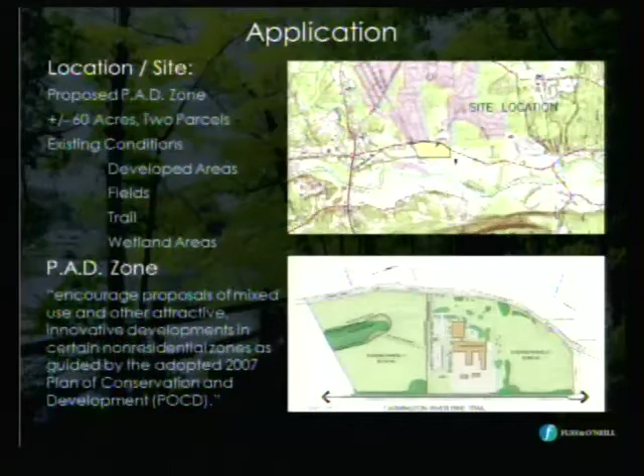So the PAD zone encourages proposals of mixed use and other attractive, innovative developments in certain non-residential areas of town. And the PAD zones are created specifically because of the flexibility that it offers to developers that want to come in and do something maybe a little bit more creative than the underlying zone would normally allow.

The prime developer is Garden Homes, of the apartments. They've been around for a long, long time, since about 1955. They've developed over 40,000 units of rental housing and an additional 40,000 units of for-sale condominium and single-family homes. They're not strangers to Connecticut - they have a number of sizable projects in Connecticut.

The design team is Fuss & O'Neill, doing planning, landscape architecture, engineering, traffic, environmental, all of this kind of thing. Bill Krosky Architects will be showing you some architecture. RKG Associates was hired - I won't show much of their information today, but if you're interested we can see it and talk about it. They were hired to look at the feasibility of absorption of these units, whether Simsbury can build and then lease these, as well as build and lease the commercial or mixed-use components. They also prepared a fiscal impact analysis in terms of the tax base that would be generated as a result of these developments.

Mike Klein, again no stranger to Simsbury - Environmental Planning Services is taking care of all of our wetlands and biological needs.

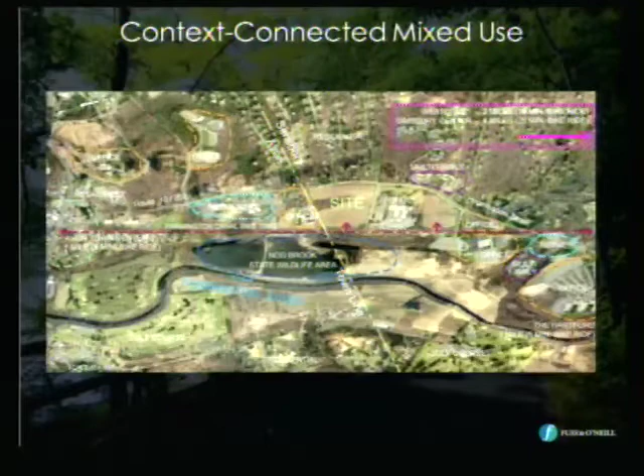This entire neighborhood is a mixed-use neighborhood. You've got employment centers on either side of the site. Here's the site. You have retail, multifamily and single-family residential to the west of Hop Meadow Street. You have the Nod Brook Wildlife Sanctuary down here, and one of the most important parts of this development to us is the bike trail. That bike trail abuts our site, and we feel it's a prime consideration with respect to the attractiveness of this development to attract people that really want to use the bike and operate that mobility alternative into downtown Simsbury, Weatogue, downtown Avon, and then beyond.

So this project wasn't completed in a vacuum. We've read and actually prepared some of the previous reports for the town of Simsbury. Clearly you're going to hear a lot about the POCD tonight and the sort of conformance with that. But Fuss O'Neill also did the Route 10 corridor study, which basically relates to this site through the ability to maintain a two-lane character of Hop Meadow Street. We also participated in the previous River Oaks application. Now, when looking at the previous River Oaks application relative to this application, we are almost half of the density and square footage and pavement that River Oaks was.

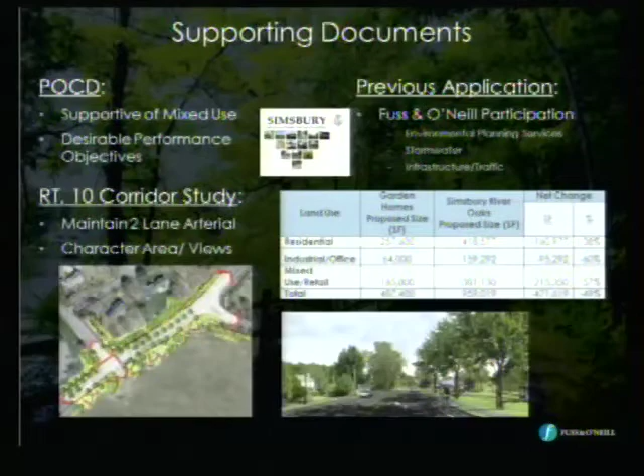So just to give you a sense of scale in terms of what we're looking at, that's where we are at this point. So the fundamental tenets of the design approach are really not borne by us, they're borne by your Plan of Conservation and Development. I'm not going to read all of these, but we really stayed very true to all of these things as part of the master planning and the design process, particularly with respect to a couple of things. One is views, you'll see some things about views in a minute. The second is the preservation of open space and how that open space is arranged. And then lastly, the two-lane character and the preservation of that character along Hop Meadow Street.

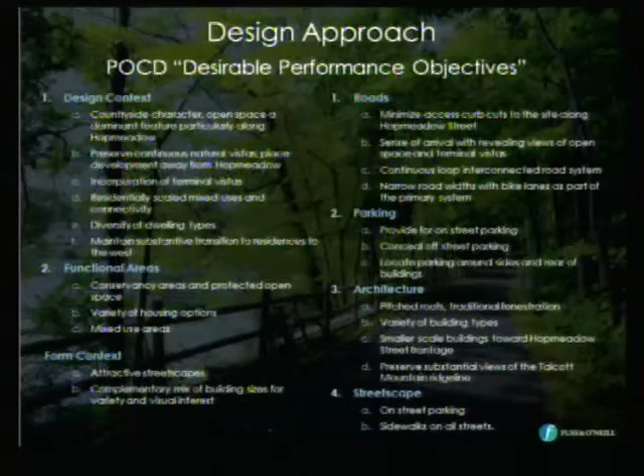Again, not going to read all this, but the Plan of Conservation is very clear about desirable performance objectives with respect to this alternative. So this is an alternative strategy, it is not the underlying zone. If it was the underlying zone, we could build a heck of a lot of office space, bring those parking lots and buildings to within 40 feet of the property lines, including the property line at Hop Meadow Street, and build them 40 feet high. So the POCD under this alternative strategy is clearly intending not to allow that to happen with the development of this parcel.

So I started to talk about views, and I want to spend a couple of minutes on views. There are some iconic view sheds on Hop Meadow Street to the Talcott Ridge and to the Heublein Tower. One of the important tenets of the Plan of Conservation and Development is to preserve a continuous view of the ridge line where possible, and to create terminal views. In other words, areas where buildings open up and you actually have somewhat unobstructed views all the way back to that full mountain range.

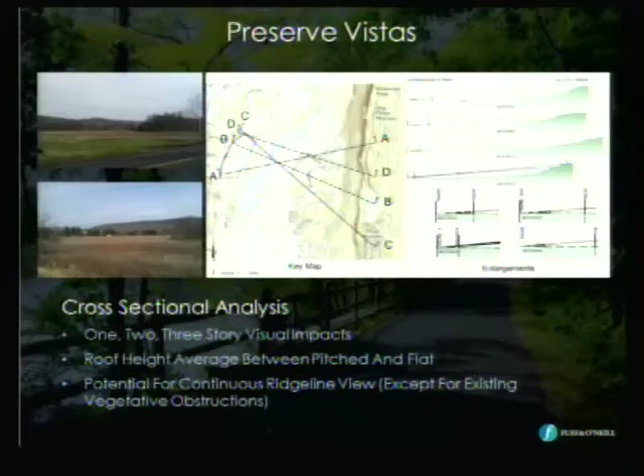So we cut cross sections, and these cross sections went from Hop Meadow Street all the way to the top of the Talcott Mountain Range, and that's what these basically are. This is a USGS map. These A, B, C, and Ds are where these cross sections are cut. That's the Talcott Range, this is Hop Meadow Street. We wanted to get a sense of, at driver's eye level, how far back do buildings need to be placed and how high can they be and still maintain a view to that ridge line. And these are too small, I understand you can't see them, but you'll see an enlargement graphic a little later when we start talking about architecture, roof pitches, and overall building heights.

What this analysis translated to was the beginnings of approximations as to for a one-story, a two-story, and a three-story building, where would those buildings have to be located in order to maintain that view? Again, a continuous view to the ridge line.

Clearly, if you loaded up this entire frontage right on that line with one-story buildings, you would see the ridge line, but not much of anything else.

So the POCD, and we agree, also recommends terminal views, particularly at these intersections from Blue Sky and Old Meadow Plain Road, the ability to see right through the site, unobstructed, to that mountain range. It's that range in this area that gives Simsbury a sense of place and serves as a gateway coming into town.

Some of these views are pretty dramatic. I will say, however, that there is existing vegetation that currently blocks those views.

So the CLMP property, which 20 years ago, somebody probably made them plant pine trees all over the place in order to block the view of that office building. Well, those pine trees are now 60 feet high, and that vegetation completely obstructs the view of the range anyway. There's an existing patch of mature vegetation that covers the wetland area I described before.

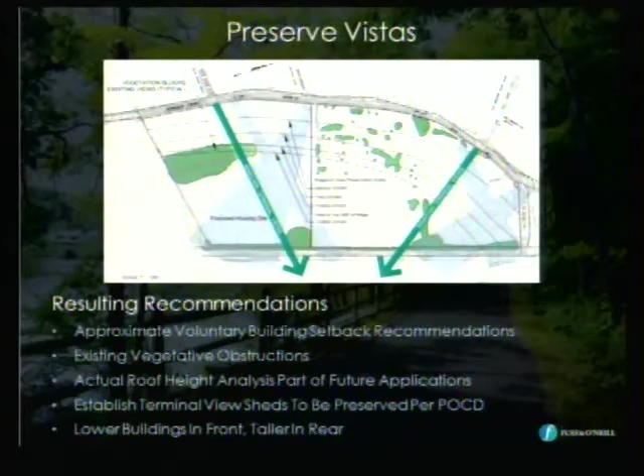Therefore, obviously, there's no views within that area. The fact that it is wetlands means that we're not going to be removing those trees, and so there are certain places here where we will not be able to either maintain or enhance the views that, frankly, aren't there today.

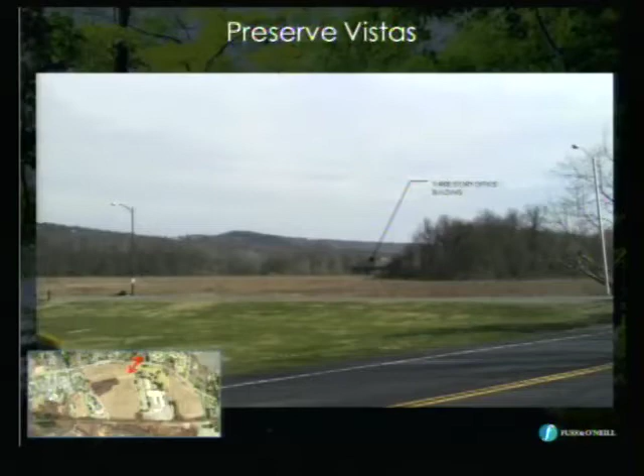Again, more views somewhat obstructed by that wetlands vegetation system we talked about. That's better, Hiram, thanks.

Continuing to move, now this is a 2 to 3-story office building, again adjacent to the site, but it's much closer - the one I just pointed out was way back there. So even with that, you can still begin to, if there wasn't the vegetation in the background, see at least that ridge line.

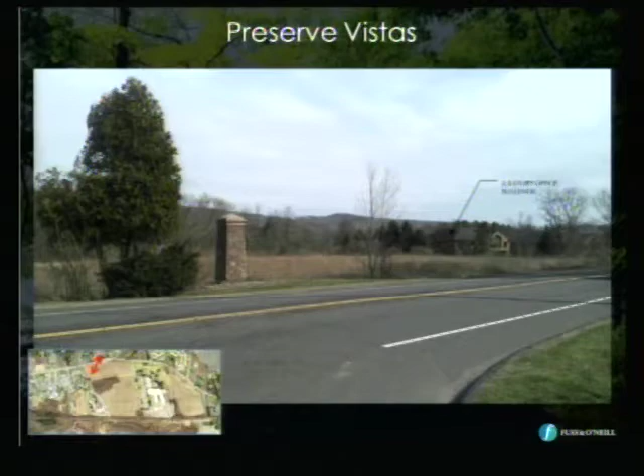Turning around, and this is probably one of the more iconic views, and interestingly enough it's pretty close to where we've set our entrance drive and purposely set up this terminal view, one of a number of terminal views. Rolling back through the CL&P site - existing scrub vegetation, which if removed would help in a number of cases.

And back out. So that viewshed system and the system of open space really was how our development pattern kind of emerged here. The viewshed analysis told us that if we can begin setting buildings back, putting the smaller one-story buildings in the front of the site and the taller buildings in the back where the viewshed doesn't matter as much, that might be a development pattern that would work.

So we've begun to establish a series of open space systems. The primary open space system is, as the POCD recommends, a green space of between 150 and 200 feet between Hopmeadow Street and the nearest piece of pavement or building. That system connects into these central open space systems, which become part of the terminal view sheds associated with what the POCD is recommending at both of these intersections.

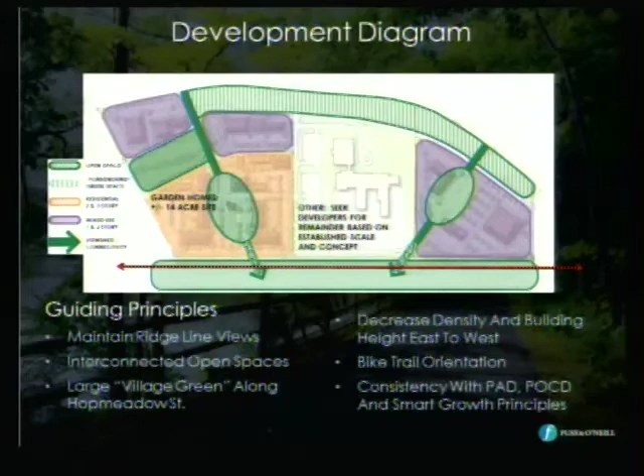This is an important component of what we're talking about. We think there's a real hook with respect to the residential and mixed-use character, and the bike trail connects all of these mixed uses in the neighborhood as well as to the town center. Hopefully people will get on their bike and ride to the restaurants in Simsbury and then go home rather than bringing their car into town. I think that's a real viable opportunity for the town.

So what happens if this project is approved? What will happen immediately is that Garden Homes, K&K, will come in and build 181 units of housing on this site, which is about 14 to 15 acres. They will own the access way that attaches to Hopmeadow Street.

They will subsequently grant rights of access to the adjacent parcels, but by the nature of the ownership of that right-of-way, this is basically going to be a 3-lot subdivision, the application of which we would supply to you if we go forward with the site plan application part of it.

As I mentioned, the entire rest of the property is pretty much going to stay in single ownership. I would suspect at some point development on this piece of land will necessitate a subdivision line that further subdivides out those two things.

So a little bit of a breakdown of each of these parcels. 1A, in the upper left-hand corner, is mixed use. That's two stories, about 51,000 square feet total for both floors.

1B is the Garden Homes site. That is 181 units of housing, comprised of 25 townhouse units. Those townhouses, because they're smaller, are located closer to Hopmeadow Street. They're 2-story, 2.5-story buildings. The remainder, 156 units, would be primarily 1-bedroom apartments and about 20% 2-bedroom apartments.

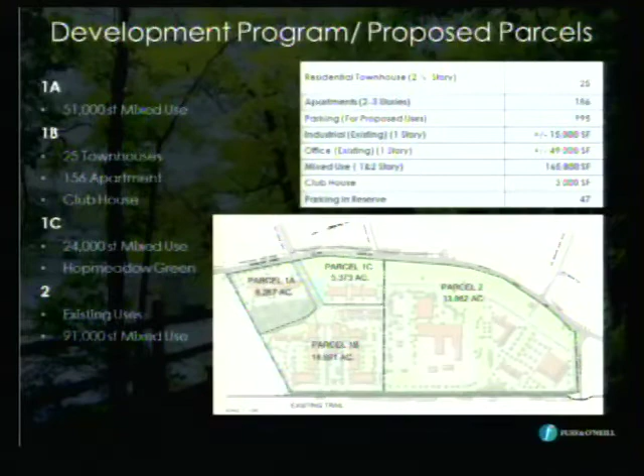In the plan of conservation and development, some of those desirable performance objectives have to do with open space, and we were fairly careful in terms of how we located open space. The open space in this plan serves multiple functions. There are passive open spaces, such as the Hopmeadow Green we talked about, that's 150 to 200 feet. And then there are more active open spaces containing active amenities specifically for the residents—swimming pools, clubhouses, and the like.

There are also passive open spaces designed to do a couple of primary things: one, break up the parking fields so we don't have a sea of parking in any one location, and two, they're part of our stormwater management system for infiltration. The soils out here are fantastic for infiltrating. So the idea from a green infrastructure standpoint is to divert pavement runoff into these open spaces to maximize infiltration capabilities.

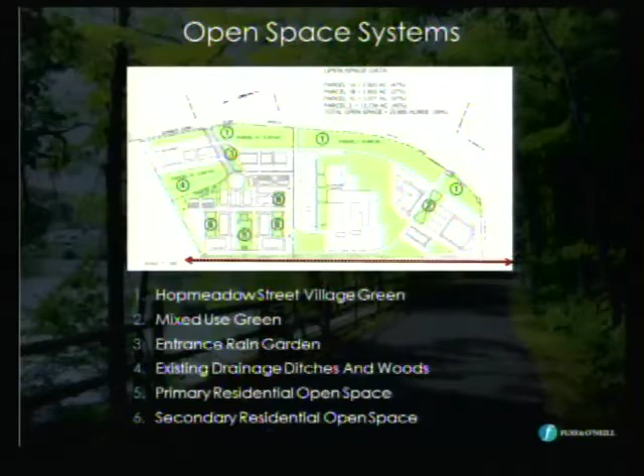This is an enlargement of the residential component, and you can start to see that's the primary open space. I'd like to point out how this is laid out, sort of a grid pattern. When you come in the entranceway, you'll have a decision point in terms of going to the commercial components. Everything is interconnected across the whole site.

So we only need 3 curb cuts on Hopmeadow Street, 2 of which are primary here and at the northern end, and 1 of which is secondary and probably going to be used for service only. At some point in time, upon full build-out, that intersection becomes a signalized intersection. However, that signalized intersection doesn't have all the warrants it needs based just on the build-out of the housing component.

So the block and grid pattern as you get in here tries to locate the smaller buildings in a block form, tries to get parking to the rear of these buildings, maximize parking on the streets, which reduces the big surface lots, and sets up a block and grid system whereby the buildings are floating to some extent in open space. We tried pretty hard to have open space on one side and on the opposite side of these things. All of this connects basically right there to the bicycle trail.

Now, in an effort to reduce pavement, we decided to take about 13% of the net parking required for the residential use and set it in a deferred status. We're pretty sure we're not going to need it - I think it was 47 spaces that would end up in reserve. That would be a contribution to the green space, though the green space and open space calculations do not include that.

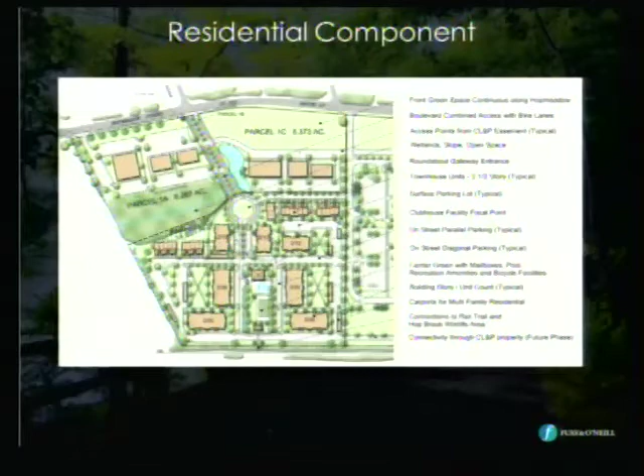I'd like to have Bill Krosky come up and maybe say a few words about some of the architectural components.

Let me ask you a question, just out of curiosity. If you take 1A and you say mixed use, what are you anticipating the components of that would be - the stores that move into that? Our market folks have analyzed retail leakage, meaning money that Simsbury residents are spending out of town. Some of the things they've come up with are furniture, hardware, and services such as laundromats - things of that nature. That's what they're thinking about now.

Thanks, Chris. Good evening, everybody. I'm Bill Krosky from Krosky Architects, and I'm in charge of designing the buildings for this project.

So the first building we're showing here is the smallest of the 3 residential building types, and it's comprised of the townhouse units - a 2.5-story building with a bit of variety in different unit types. One of the things we tried to do for this project on all 3 of our buildings is capture traditional New England character by using pitched roofs, residential clapboard siding, double hung windows, and things traditional to New England architecture.

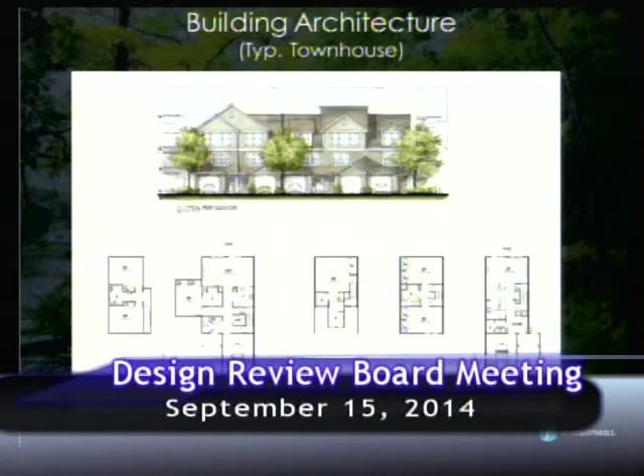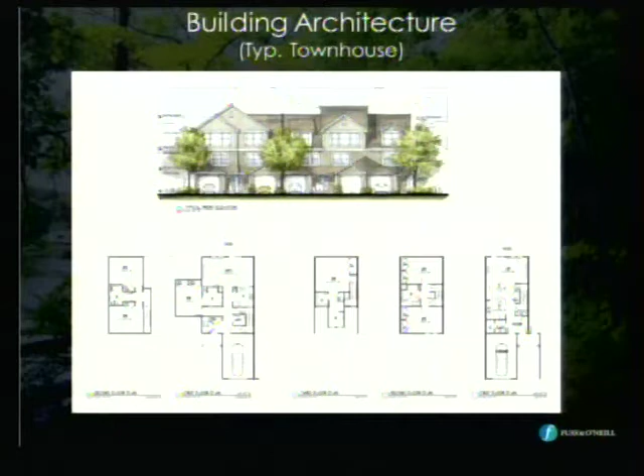So this building, again, is the townhouse building. We're showing a typical unit on the lower left, which has a garage and entrance at the main level, entrance foyer, open kitchen, living, dining room area, stairs to the upstairs with 2 bedrooms and a bath, and then in the roof shape a master bedroom suite with its own bathroom and walk-in closet. We also have another unit on the left, which is an accessible townhouse with a bedroom and bathroom on the first floor and 2 bedrooms on the second floor.

Now, the units will be units of 4? We have, I think, one building that's 4, several that are 5, and one that's 6 in terms of the clusters.

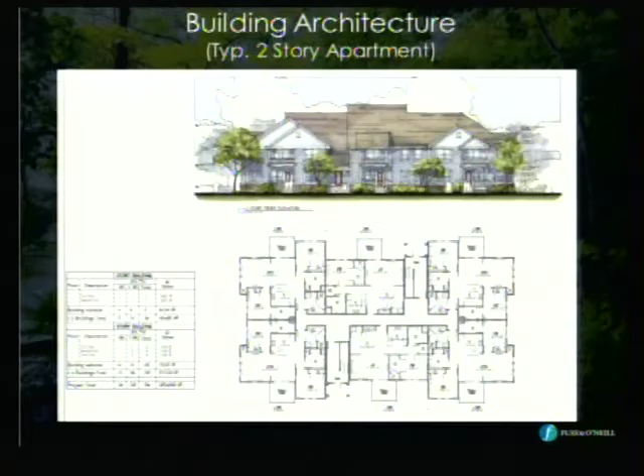This is the middle-sized building, which is a 2-story building. All the units are flats, and you can see in the plan there are 6 units on this level, 3 on each side. We have an entrance point on either side into a stairwell and lobby and a common hallway.

The first floor of this building, we've got individual entrances that lead into those ground floor units because we want to try to create a neighborhood feel to the development where all the ground floor units have direct entrances and front porches, so that the neighborhood feels friendly and walkable.

We're using traditional materials and massing and features of New England architecture. We've also got some cultured stone on the base here. We'll be using vinyl siding and trim for the siding and the trim, and then asphalt, architectural grade asphalt shingles for the roofs.

And this is the larger building that occurs at the rear of the site. It's a 3-story building. Again, all the units are flats, and we have 10 units per floor. We have a stairwell at each end, elevator in the middle, entrance from both sides into that common space.

On this building, all of the ground floor units have individual porches and entrances. The upper floor units have porches that are above those individual unit entries, so they have outdoor space as well. This building has a little variation on one end, depending on how the buildings are adjacent to each other. In some cases we have the decks on the end, in other cases along the long face of the building.

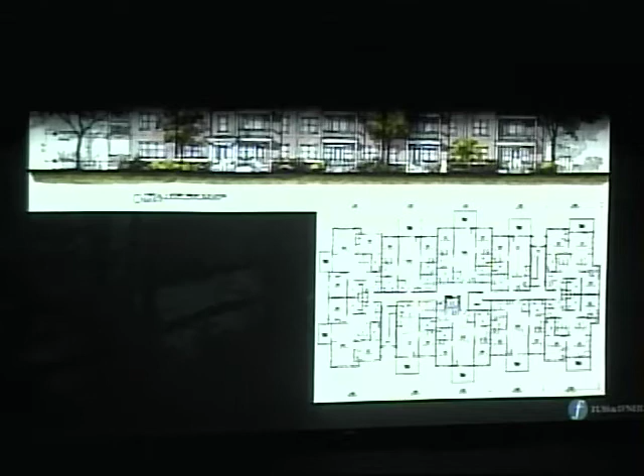Are we going to get to the site plan in a minute? We can go back to that, we'll get to the site plan again and point that out. We'll also have a small community building, a clubhouse that sits on the green, a little 1-story building that's kind of the jewel of the project. And then we've shown a character image for what the 1-story commercial that would be built at a later date would be, out at the street line.

Chris, you want to do this part? And that is not part of this, that commercial is not part of what we're looking at today?

Well, what we're approving today is an entire master plan, a PAD, a PAD zone application. The PAD zone includes things such as the mixed-use components that would be built in the future.

But are we to comment on the design of that building right there? Well, you can, but it probably wouldn't make any difference. This will be a situation where, from a character standpoint, this is maybe the kind of architecture that... Okay, that's all I wanted to know. And in the future, the other three are... Yes, that's what you're gonna do. That's what we're doing, yes, all the housing.

So in this diagram, we just wanted to show how the height is diminished at the front of the site. Here, the commercial building is one-story, and then the buildings get a little bigger as you go towards the back. You can see the relative scale here at the bottom, and the green line shows the view line.

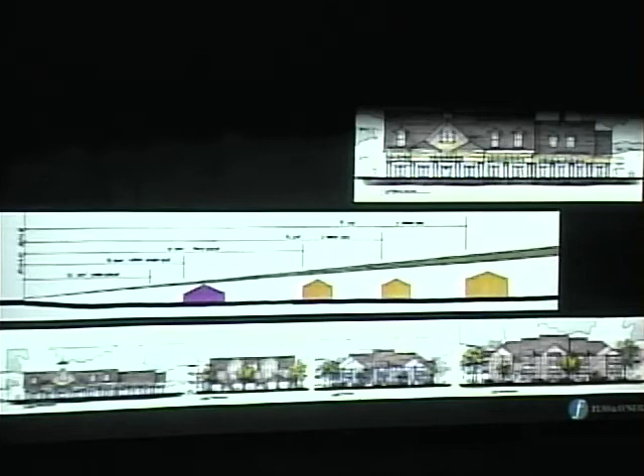I just want to go back and cover one point on the townhouses. In this case, there are rooms in the upper floor unit that are built within the roof structure, so it does have dormers to bring the height down. You can see the eave line here that occurs at the top of the second floor.

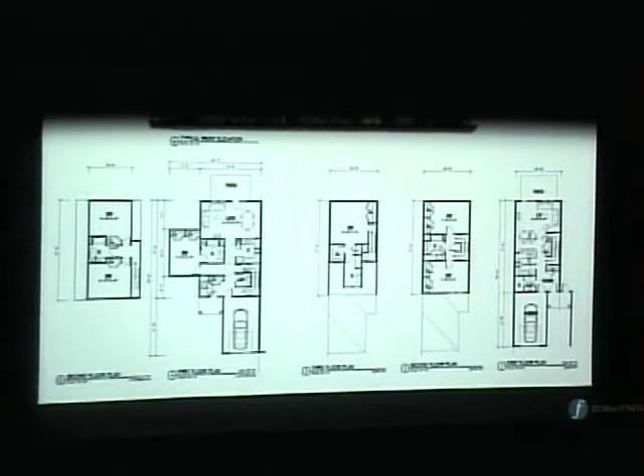We've tried to do that particularly in the townhouses at the front of the site, where we have a little more flexibility in terms of building construction and design when we don't have to worry about communicating horizontal spaces such as common hallways. So we have more flexibility with this building type as opposed to the bigger buildings. Just wanted to point that out.

From Route 10 to the back of the property to the bike path, how much does it drop? Well, it's almost dead flat, except from Hopmeadow Street, where it drops down pretty quick, about 6 to 8 feet, and then drops a little further as you get further back.

As you get to this wetland it drops a bit, but when I set the elevation of those structures I figured a good part of this would be filled in anyway -- it's sort of like a swale. Fundamentally the site is almost dead flat, but it drops about 8 feet between here and here. The total site is about 900 to 1,000 feet in depth total.

To answer your question about parking, the two bigger buildings are these two, and we have parking along the back, parking over here, and parking on the street in front of both of those buildings. So it's really spread out pretty evenly around the site.

While you have that up, Chris, I have a couple of questions and comments. What exactly is going to happen with the CL&P buildings and landscaping -- is that going to remain exactly the same? I would assume so, at least in the short term.

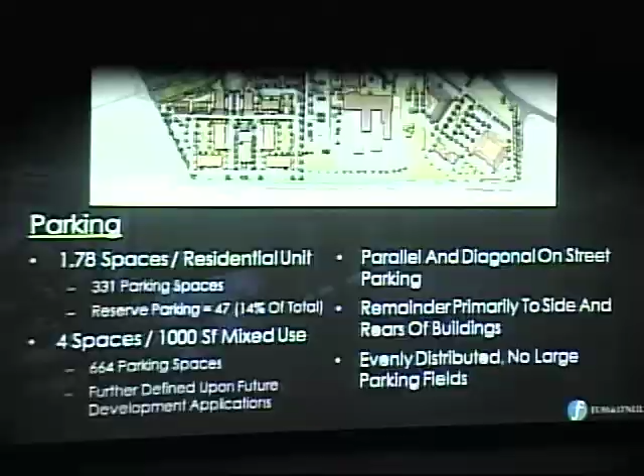One other important point, along the questions Tony and John asked, is that the density you're seeing in this master development plan is locked in, should the PAD be approved. So the density is locked in. Now, whether the building arrangement changes slightly would be something you'd see at the site plan stage. This is a master development plan concept with things like the amount of impervious area, the amount of open space, and the density locked in at that point.

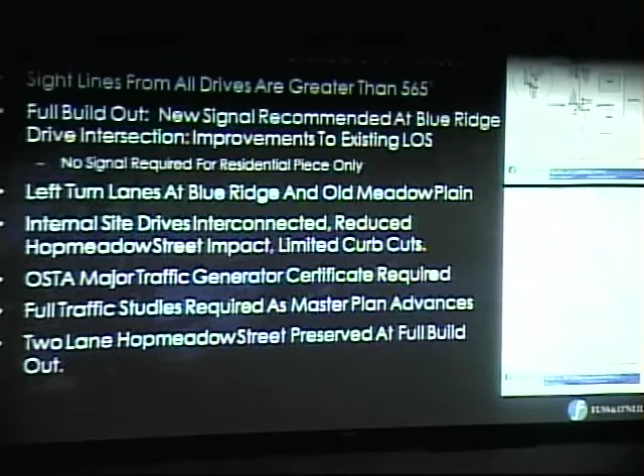Again, not going to go through all of this, but the bottom line is we've done a full traffic analysis, with the full reports in the appendix. Character of Hopmeadow Street is a key component of that, and I think we've achieved that.

So for the desirable performance objectives, I've talked about most of these already: preserving the vistas and views, the character and integrated nature of the mixed open space program, the variety of housing options between townhouses of many styles and the 2 and 3-story multifamily components, the mix of uses which ties into the POCD, and the mix of building sizes. We've placed smaller buildings in the front to preserve the view sheds.

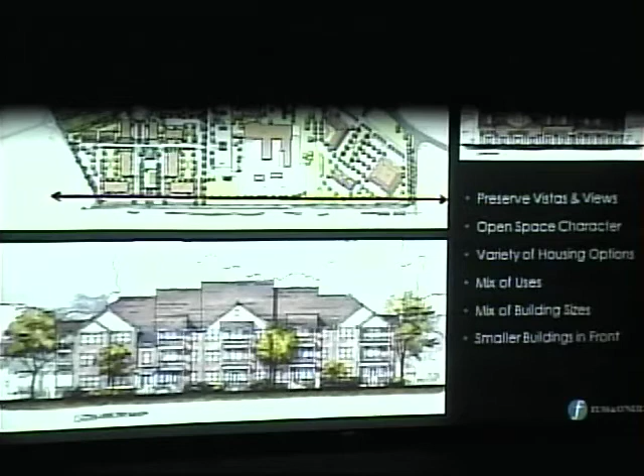And all of this ties right into that bike lane, which I think is going to be a tremendous asset to whoever lives in this community. We're going to propose, and probably inevitably build, bike storage facilities, because I think that's how popular this is going to be for bicycle enthusiasts.

Continuing with the performance objectives, access management is a high priority in the POCD - how many curb cuts on Hopmeadow Street, and how we can efficiently manage our own traffic volume internally with a connected system. At some point, when future development occurs on additional parcels, that connectivity as part of the master plan will need to be incorporated into the site plan approval process. With that system in place, we have 2 new primary entrances along the Hopmeadow Street frontage, 1 secondary entrance, and we're utilizing CL&P's existing driveway as the 3rd primary entrance - not a new one.

There's one question that came up at one of the other presentations: the access way behind the Northeast Utilities building. I know you perhaps can't speak for the current owner, but is there some indication you can give as to whether that could be done in the future, in terms of connecting the north side site with the south side?

Yeah, physically, absolutely. The way we addressed that question was that CL&P is going to be interested in the security of that yard. So at some point it would be a negotiation with the landowner and his leasee in terms of how we create that connectivity while still providing for the operational clarity and security of that facility. Frankly, one of the fire marshal's comments - we've already met with him, and he's enamored with the idea of building this piece right away, because from a firefighting perspective, having that second means of egress in and out of the site would be very beneficial.

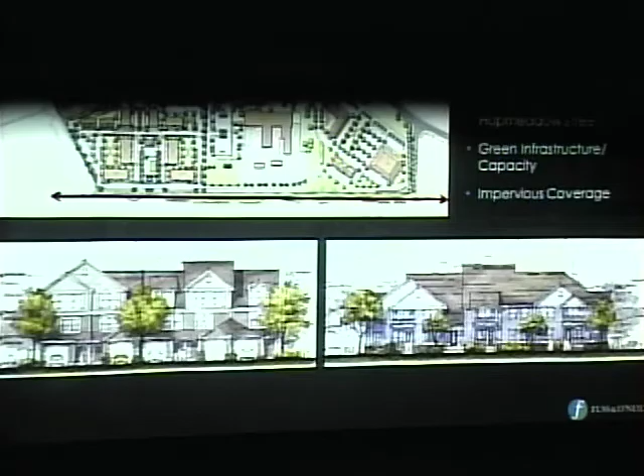Just a quick question - how close are the Avon buildings? There's the Avon town line - the nearest building is that townhouse, its side faces that way. On the Avon side, there are buildings - looking at the survey, that parking lot is about 60 feet away, and that office building is another 30 to 40 feet. What's the building down at the bottom of the map? On the Avon side there's a small square building with a porch - that's an office. This whole section is basically an office park, East Point Park, surrounded by parking.

So additional evaluation criteria has a lot to do with this commission - how we've arranged things. I tried to point out the block and grid pattern and how the circulation system has been developed. Bill talked about how we arranged the buildings in terms of scale and character as you move through the site.

The system of open spaces, and the fact that the buildings are very close to the sidewalks—all of the first floors have their entrance onto the sidewalks, all of the sidewalks abut on-street parking, and then all of that surrounds the primary open space. That's the sense of enclosure we're trying to achieve here.

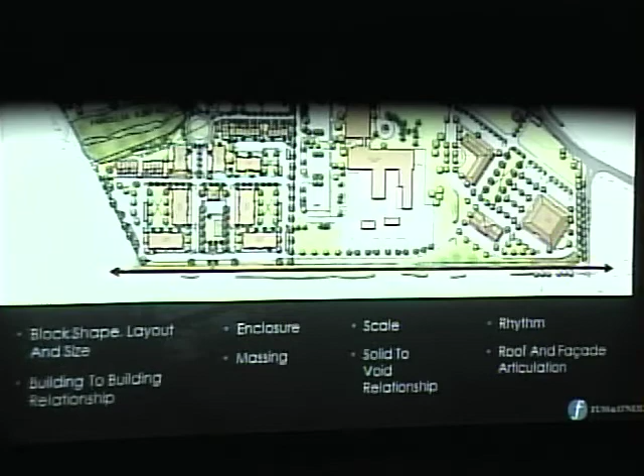And that concludes, I guess, our part of this, and we'll certainly open it up.

Compared to the Hartford building and how far back it is from Route 10—is this about the same distance? No, the big residential buildings will be within... no, Hartford is way back, much further back. Much deeper site, different.

So what's the CL&P building going to look like architecturally as part of this plan? Is it going to be altered to fit in with the architecture created for the other buildings? I don't believe so. I believe at this point in time, the CL&P would remain as it is.

So for future use of the CL&P building, if someone were to come in and say, I want to demo the CL&P building and build something new, that would have to come back through for review. Would they be limited, or could they build anything they want there? Well, within the PAD, this is set aside as an industrial facility with office buildings in it—it would be limited to that particular coverage.

I would say also, the way this plan is proposed, it's limited to one story. If the use were going to change, or the building were going to change, you would see that and make a determination along with the zoning.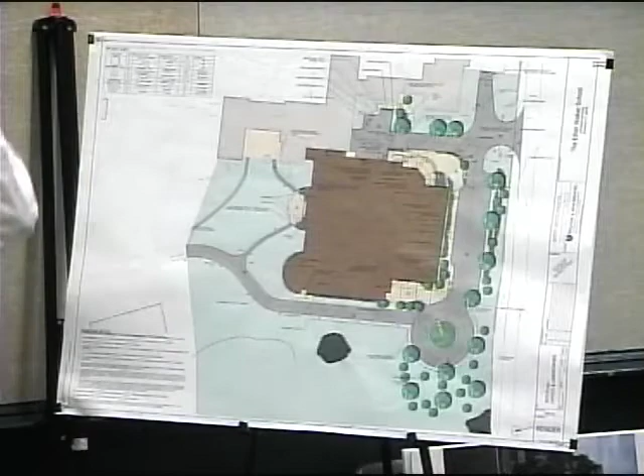One thing we did work with Hiram was we have parking in here, and Hiram's request was to beef up that landscaping a little bit so you don't see the headlights. Now, granted, this is up in the air—as you know, this is pretty high up, and there's a large bank here. But we did take Hiram's suggestion, and we beefed it up: instead of just higher trees, now we put in a low shrub layer, so you really won't see those headlights or those cars parked through there.

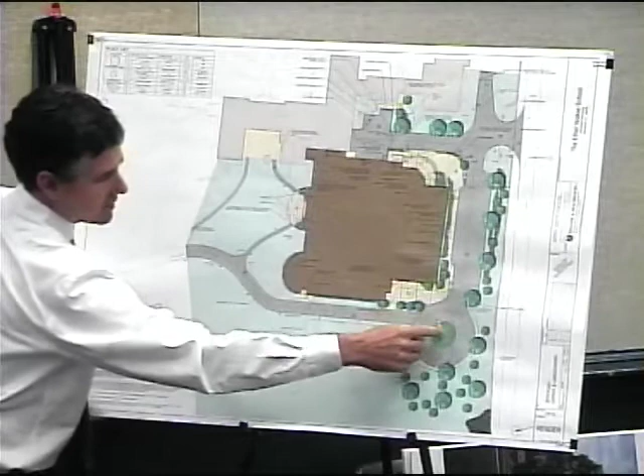But once again, we have some large gathering spaces at the 2 main entrances. Really, the building is the star of this project, not the site planning. The site planning is relatively simple. We will have a landscape turnaround here and a large flagpole located there, but generally the site really fits in.

And as you can see at the back of the building here, as you travel down Bushy Hill, you're virtually not even going to be able to see this. This does create an opportunity to create a new back door or a formal back door to the school, but you really won't be able to see that, even with large pine trees and large vegetation by the front. Even as I travel down that road all the time, I'm not sure I have ever actually noticed the back of the existing building.

It's screened very well. So what's the new building going to be? What is the use of the new building? It's going to be gym, athletic areas, squash courts. Lee will walk you through the very detailed design. But it's really about wellness, really tying together the whole campus. Right now they do have an indoor gym, but it's dated, is what we would describe it as.

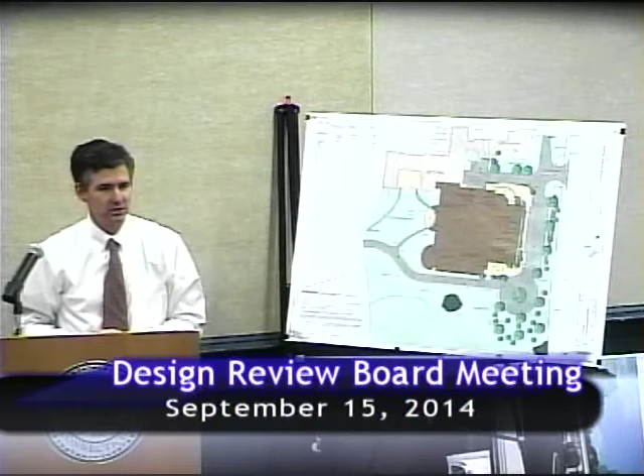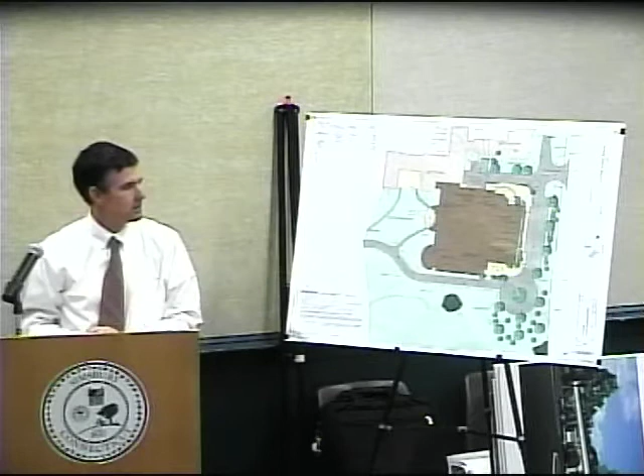So there's the site plan, but I'd like to have Lee come up to get into the real exciting stuff. Is there anything on the ground now where that building's going to be located? It's all pavement. There's a small health center right here. If you go by, it's about to come down, they're doing some asbestos abatement. Right now this is the driveway coming through here, and they have parking fields all through here. So it's not green space today. I'd have to give you the exact number, but probably 75% of that area you're looking at is already pavement.

Nice. Hi, I'm Lee Sherwood of Omar Architects, and it's really hard to tell anything from a site plan like that. It looks like a big blob that we've been working on the campus. Hopefully we can make that a little more clear for you and see what's going on.

This is a different way of looking at it. We've been working with the school for about 3 years, really, in terms of doing a master plan, understanding their program. We work with independent schools, and this is a girls' school, so it was a very different kind of school, a different feeling there. It's a beautiful place, and one of the things it has is the beautiful view and that big solid gym right there that's kind of on the hill.

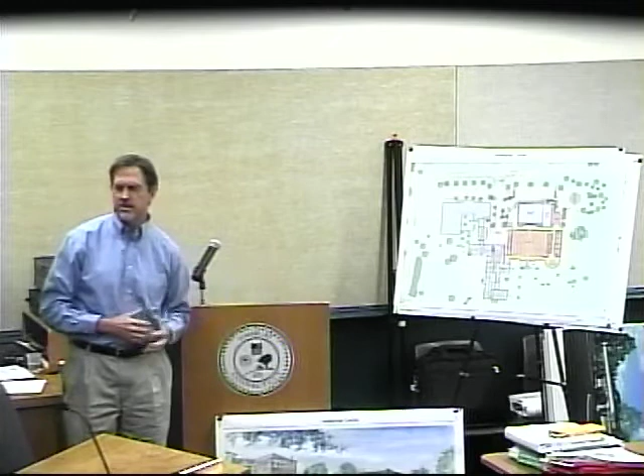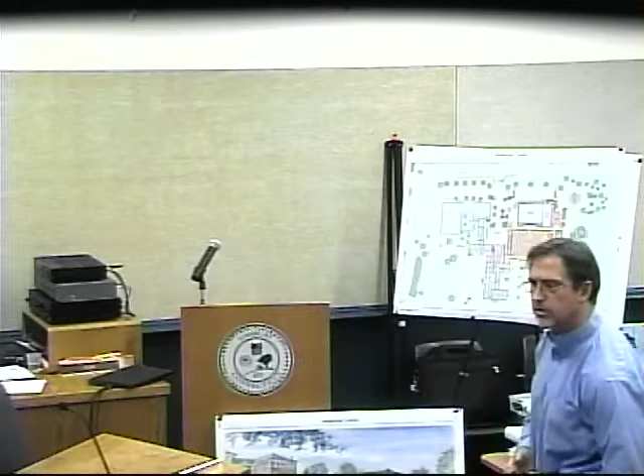When we first started looking at the idea of athletics on the campus, we looked all over the place, down the hill, at different places. But when we felt that for the girls' school the idea was integration and wellness, wellness is different than just athletics. Wellness is part of your everyday life. So when we finally placed the building, if this is Beaverbrook right here, the building starts to integrate with the rest of the school, then it becomes part of their everyday activity. So it was an inspired place to put it.

We did a design that was actually quite a lot taller and bigger, and that went through the process of, oh my goodness, that costs a lot of money, and that whole process. And actually, people are saying over the last few months that they really like this building. It's much more in scale. It has a different feel on the campus. It feels like a better fit.

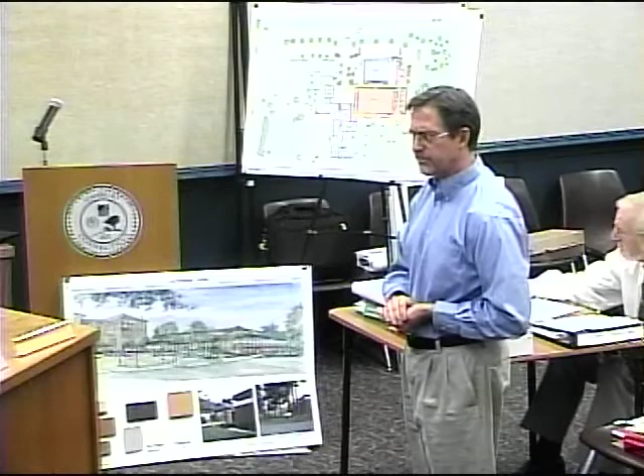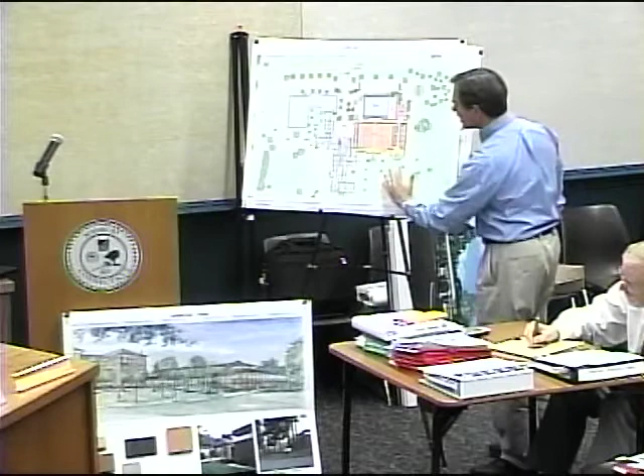So, just so you know, if any of you have been there, there are larger maple trees over here, and there's even a sugar grove, and we tried to keep that feel over here. This is where the hill falls away to the field, and there's these wonderful views. This is actually the south face. We're very sustainable, we're going to show you a lot of daylighting strategies and things like that.

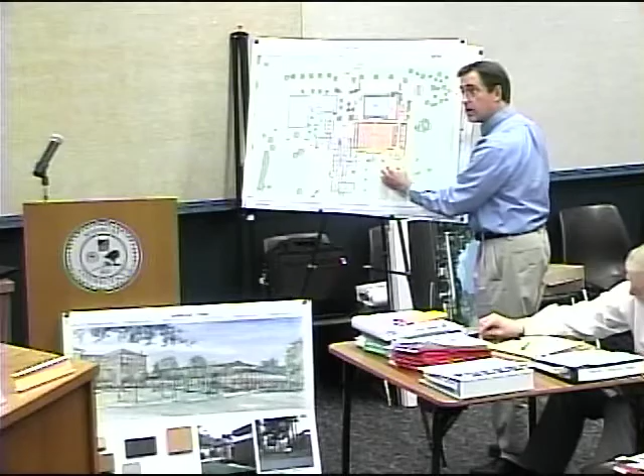So if this is Beaverbrook, the intent was to connect to Beaverbrook, have galleries and places for the girls, have even a little student center gathering place right on the lawn side. They're going to put in gardens and things like that and make this a real lawn so that they can use it in a totally different way.

I'm not even going to use the word quad because they don't talk like that over there. This is a lawn. This is a place to be.

Then we put the larger piece, this is a good planning strategy, right in the middle, right here, and wrap it. You'll see it wrapped with the lower pieces, so you don't see that huge box, which is always a double gymnasium.

Along this side, you'll see dance studios, and underneath here, because the slope slopes down, you're going to see a whole health center. So when they took down the building right here, that was part of the health center.

The health center will be under here, and it'll actually be accessed from right here. This goes down to this area, so an ambulance could even come right to the health center if a kid was hurt and had to be taken somewhere.

And then we have what you'll see is a pool or a natatorium, some squash courts, fitness, and things like that. It's kind of nice when you come in this way, visitors would come in and they'd have their own entry right here. That connects pretty well. But the girls will probably come in and out of here all day long.

Is that a pretty good orientation? No, the athletic fields are down. Yeah, they're way down here.

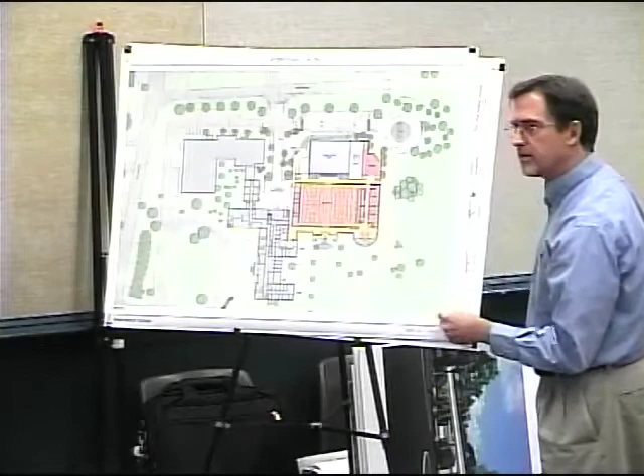You're also going to see that there's a door here on the lower level that goes right to the health center and to the lockers, right down to the fields. Since we had a couple tries at it, this building's been pretty well planned.

This is another way of looking at it in terms of floor plans. So you are seeing the upper level right here. So if I'm on the lawn side, where Beaverbrook is in the back, that's how you enter. When you come in, there's a lobby and it all connects to the student center.

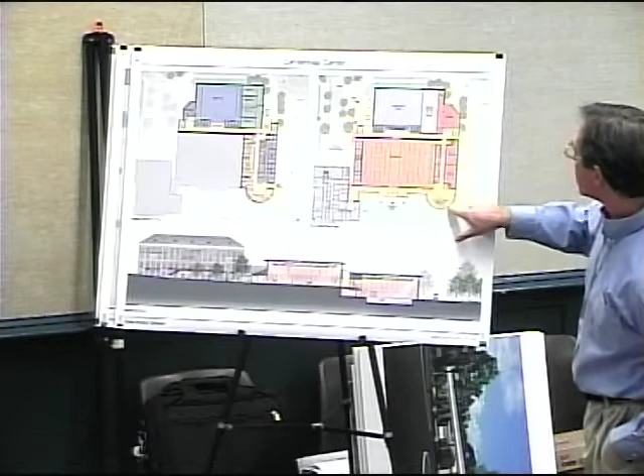From up here, you can look down because this goes along like this and steps down. So here's a section through the lawn, through the gym, down through the pool and out. So you're up here, and here's Beaverbrook, and Beaverbrook's a pretty tall building, right? And you come along like this, and we connect nice and low, have a porch.

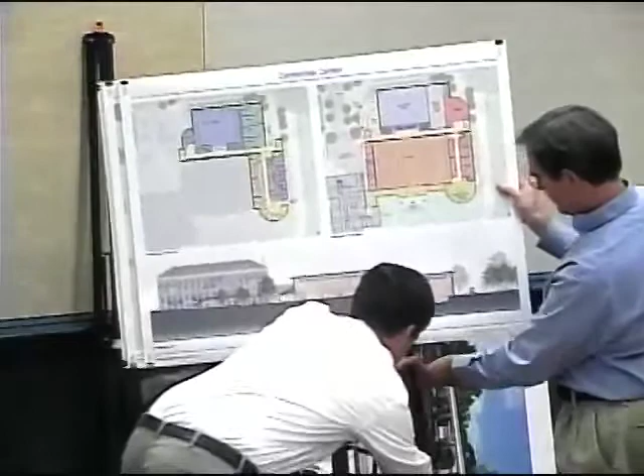Whoa, is that gonna really do that to me? Just twist it there. You'll have to help me out. There you go. Thank you.

You're an architect, not an engineer. No, that's why he brought me on. I never pretended to be.

So in terms of, you have the gym, and then it steps down with the grade, and here's the natatorium in the new pool building. By the time you get to here, it's the same height as the surrounding buildings right to the side of it. This is the middle school building right over here, and it actually aligns right up with it.

This building really just fits on campus. A couple of the other things, we really did spend a lot of time trying to understand service because the kitchens are here, and understanding how to make this kind of more of a European service court feel, where you have a wall and a screen, but it's there, and it's about as simple as you could make it.

Right now, the service is actually right on the back of Beaverbrook, and it's just sprawling. So we've really consolidated and worked really hard with the mechanical engineers and everyone else to make it all work.

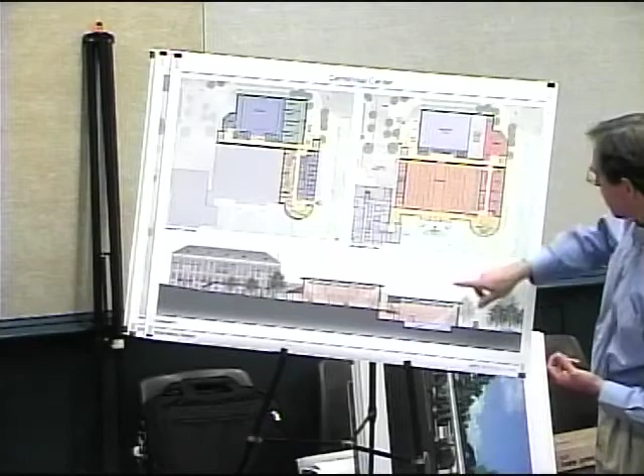So from up here, you'll have beautiful views. And down below, if you were to come down like this and enter, there's a little covered area. You can imagine the teams would come in on this lower level, lots of girls coming in. There's a place to enter.

There's the locker rooms below, or the team rooms, and the trainer, which goes to the fields. Here's the whole health center, right here. They even have little places for overnight stays and things like that. And here's the brand new natatorium, which is a real 8-lane swim opportunity, and 4 squash courts right here.

So they can start to compete. They don't have squash, they don't have a pool right now. They can start to compete with other schools and have some good tournaments going on.

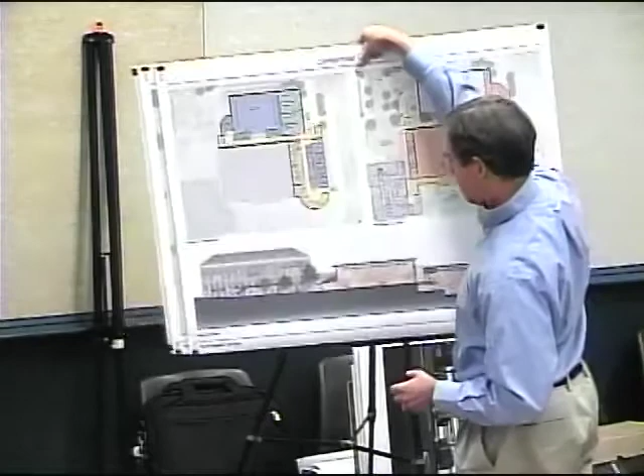Let me take off some of this heavy stuff. Let's start with this side. These are renderings that were done when we redesigned the building. So I think you've all seen this sort of view.

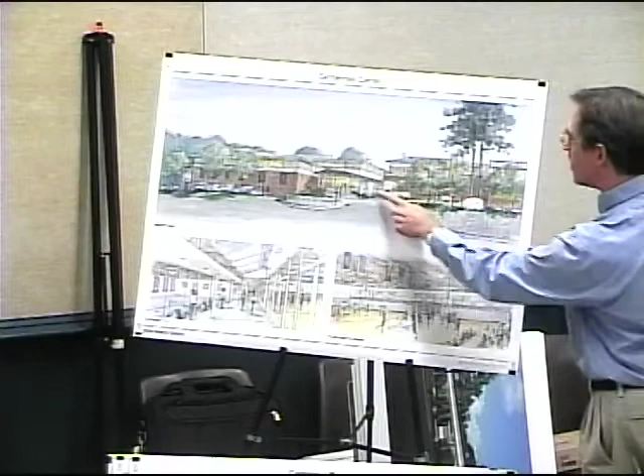This is the middle school right here along Sand Hill. If you look beyond, you see Beaverbrook coming up and all the other buildings. You can see a gate here to hold a kind of service area.

So you come in, and you can see how the building steps. And what I'm telling you right now is that it lines up exactly with this right here, and it's about the same height as well. It's an interesting campus in terms of architecture.

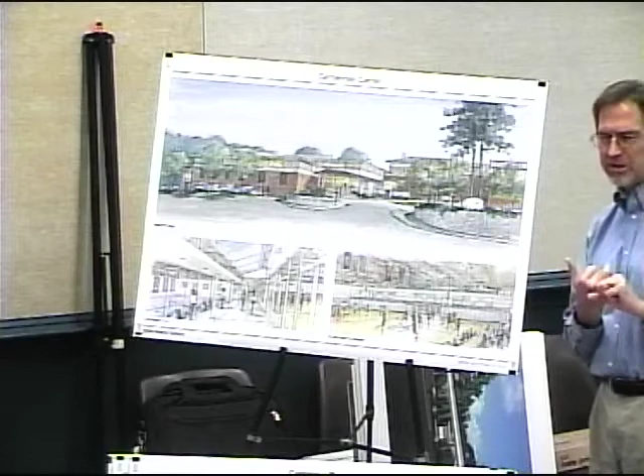You have Beaverbrook, which has the big columns, and I'll show you a couple of pictures to remind you, and brick. And then some of these other buildings are kind of more 70s modern. They have the material, they have the scale, they have the proportion, but it's a different kind of aesthetic.

And what we're trying to do with this building is do a contemporary building that fits and still has some of those elements that feel good, creating an environment.

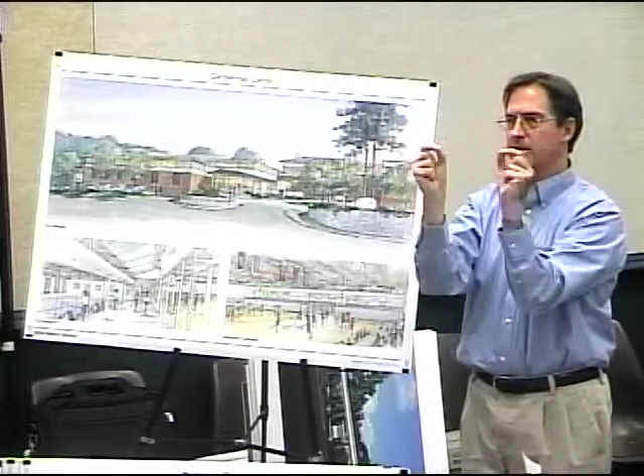So there are columns here, and they are wood, but they're not Doric columns. They're more square columns that have nice detail to them, so they're a little more contemporary in that way.

You know where the front door is, and you know where the door is on the other side. And then this becomes just a really nicely designed wall, and it's not too tall. And what we're really doing is we're going to be growing some green wall on a portion of it.

And then you'll see the panels, and then you'll get the light down, the natural light down into the pool area. And then the gymnasium will also get high clerestory around with nice overhangs holding that in.

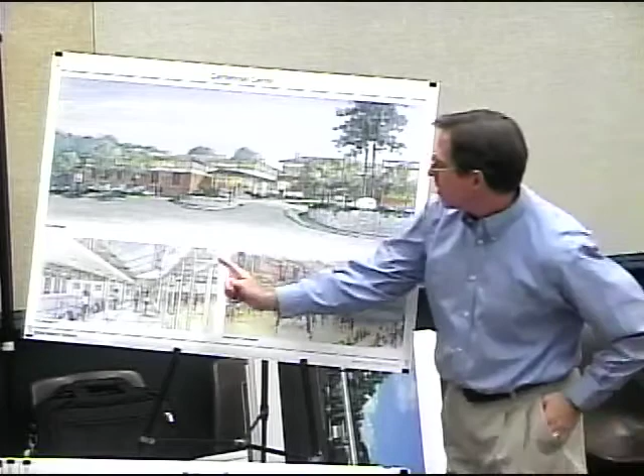What material will be on those panels? I knew you would ask. You're supposed to ask that.

So what I was going to do is say, okay, so here's a gymnasium, day-lit, open, and here's an area where you walk inside and you look down into the pool and into the gymnasium, and there's light coming in, so it's all very connected.

If I take this piece right here, let's see if this really works. I'll probably have to hold it because it's so heavy. Here we go. Can we see it? Can we hold it? Do you want to see it like there? Yeah, that's fine. Here.

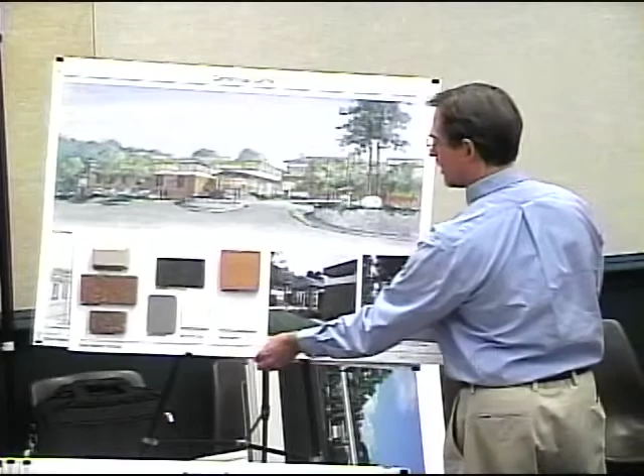Here you go. So the photos that are right there are intended to say, this is the view from Sand Hill, and then this is the middle school right here, and we wanted to show you how there are actually a lot of different materials on the campus.

So what's rendered kind of brown in yours is what, brick? So what we're using right here, we're using a terracotta smooth ground face block. This one, a terracotta. So it's actually going to be scored square.

So it's again bridging that feel of a little bit contemporary, but the exact same hue and the same feel and the warmth all through here.

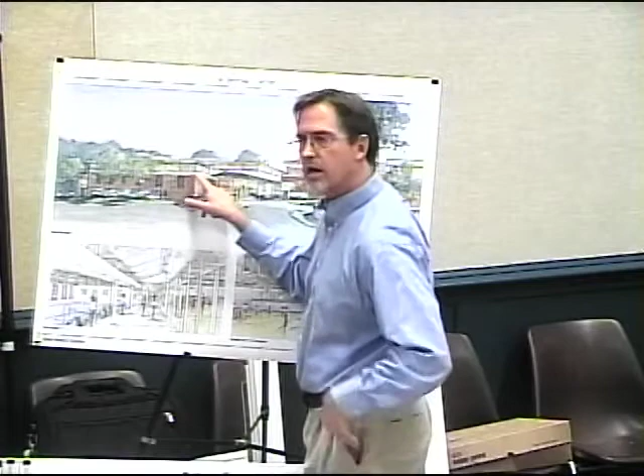And then this right here is that concrete, right there is a concrete band right here, which might have maybe some stainless steel letters or something that say, Ethel Walker Centennial Center.

And then as you go up, you'll have, so it feels very substantial here, and the grade is going down, and there'll be greenery all along here, and it'll be nice.

Then roof, and you're going to see it on the other side, where we have some of the lower roof, and that is meant to look, it's asphalt architectural, but it wants to be shingle in scale, slate scale. You've seen different kinds of those treatments. We just can't afford to have the slate that's on top of this building, but we want to be reminiscent of that and be respectful of that.

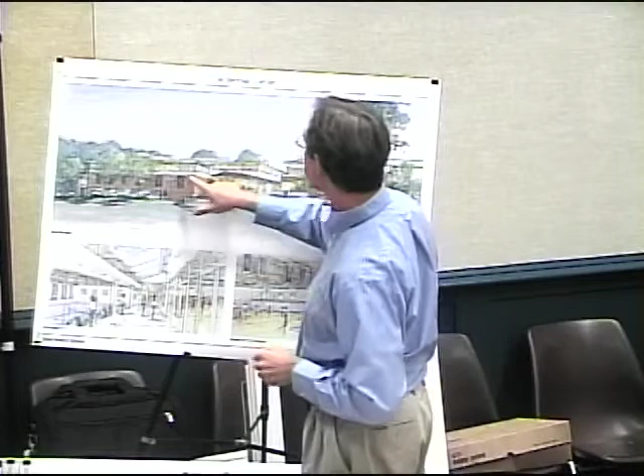So those are the basic materials. We are putting up screens, so if we do have some rooftop units, we're in construction drawings, so we're really figuring all this stuff out.

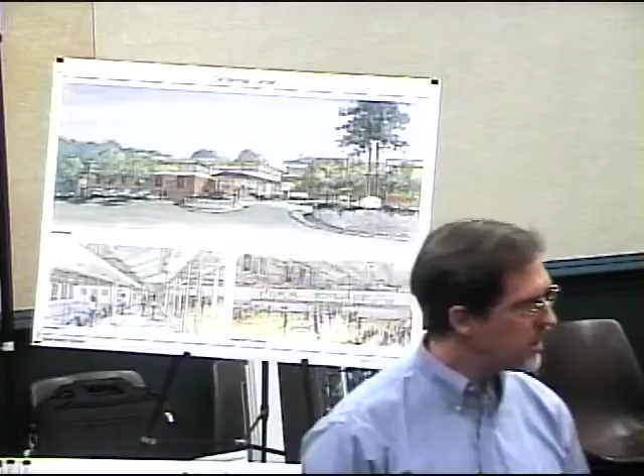Do you guys have a CM or a contractor? We have a CM, which is C.E. Floyd. Have you heard of them? They've done a number of independent schools. The school has hired them, and they have been working with us, doing estimates and doing constructability and all of those kinds of reviews.

So we figured that you'd probably want to see this view first, and we can go back to it.

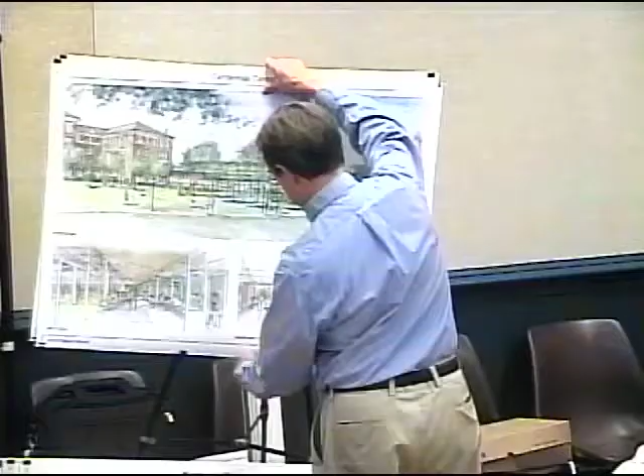This is the side view from the lawn. So you've stood back here and seen Beaver Brook before, and what we're really doing is connecting to it, creating a porch-like sun room, almost like a stretched sun room that comes along.

If you're standing inside of it, it has wood slat ceilings. You look into the gym. There's sun spaces off to the side. You can look and really be part of the green.

And then here you come along, and this would be the whole gathering space with an area for light to come down. I don't think I can call it a cupola - it's more of a monitor.

One of the ideas here is, if you can imagine, we've done studies of this at dusk, glowing at night - you can really see in, and the girls will be part of this side. So this side obviously really opens up, and you can see the purpose of that, and engages.

And then as this peels away, the base is that same masonry, and this is the student center, the health center, and that wraps around, and you see it along the other side. Its scale is complementary, but it does not compete with Beaver Brook.

This is an interior showing this area right here, which is the gathering space. And when you come down this interior walk, you look right out and see the view. But here, this is the real view.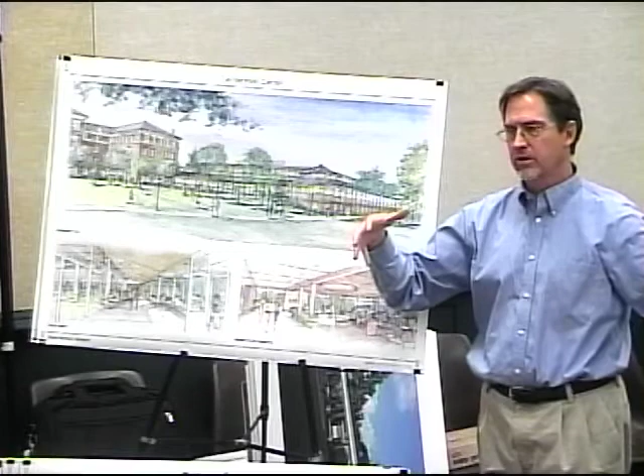And then lastly, we did have this as well, and since I gave you the other one, these are pictures. We're trying to fit in terms of material, scale, and proportion, and we're hiding equipment - we care a lot about it really just fitting.

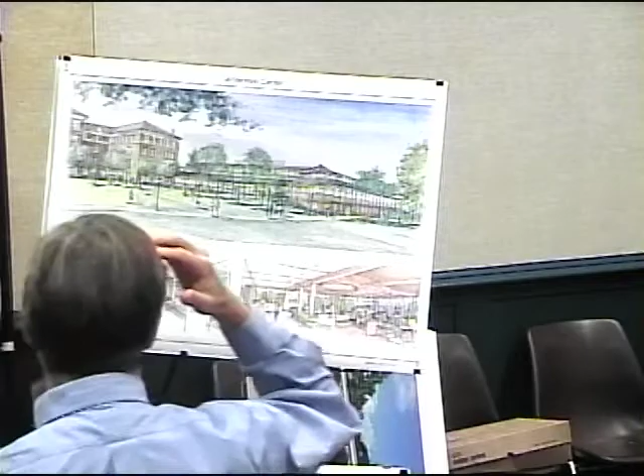I think they ended up getting all of the program that they really needed to be transformative. This building is important because they haven't built a building like this in forever. When was the last time they built a real building? This building is very, very important to the school, and they really feel like it will change everything.

You're definitely hiding a lot of equipment. Yeah, and hopefully we're doing it well. Under the pool or? Well, that's interesting.

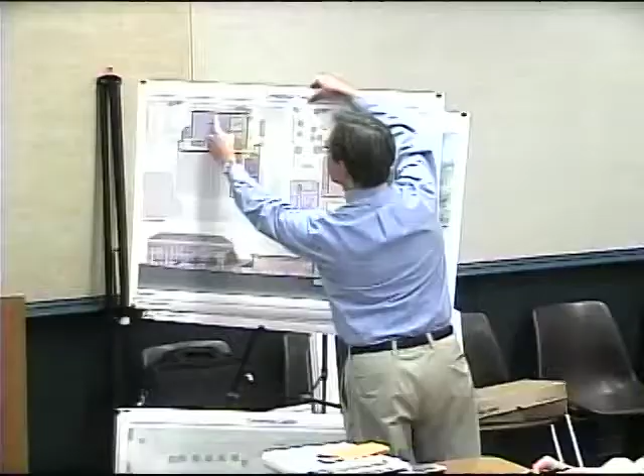These plans have come a really long way. Here's the natatorium, and the pool - actually the pool equipment room's not that big anymore, but we put all the mechanical equipment on this interface right here, so it has a really great mechanical area.

It's well laid out, I know, because we laid it out. But everything - this is really simple. And then on the roof, there are rooftop units like this, but we're putting a nice screen on them, and we're pushing them back enough with the stepping that we feel like we screen them anyway. And also that'll help with noise.

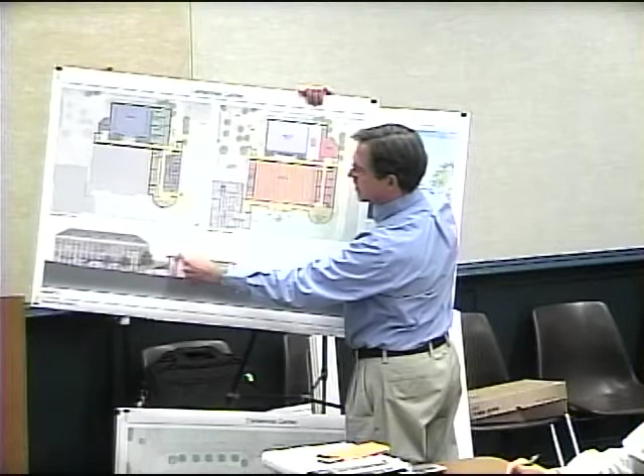The other thing is that this roof will be set up so that it can have photovoltaic panels in the future - the roof will be structured and electrical will be hooked up for that. Right now, though, it'll be a completely daylit space because it'll have glass all the way around it.

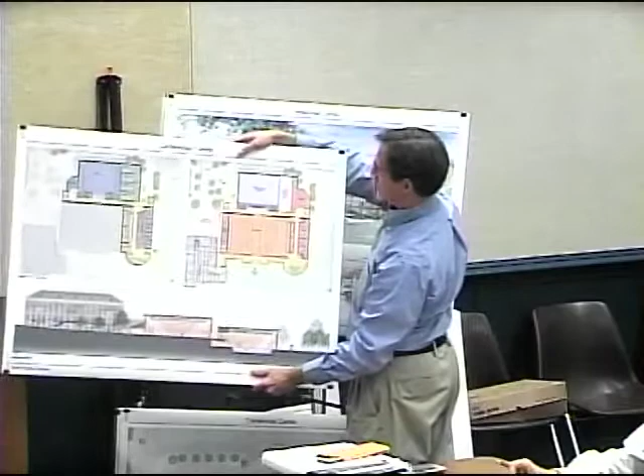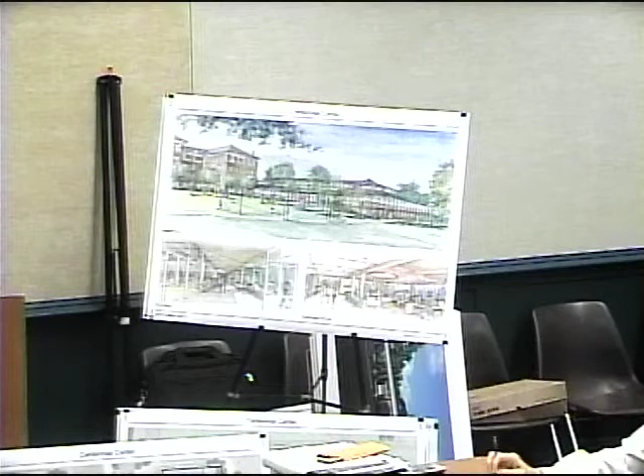It's a pretty big project to get your head around. I've always felt like the renderings were the most revealing. And while they're not computer renderings just yet, from this scale and from this, they really haven't changed from this vision and this reality. I don't really know what your questions would be, but... It's an excellent presentation.

Remember it was fighting it, but now it really steps with it and the scale comes naturally. And that view is from the athletic field, right?

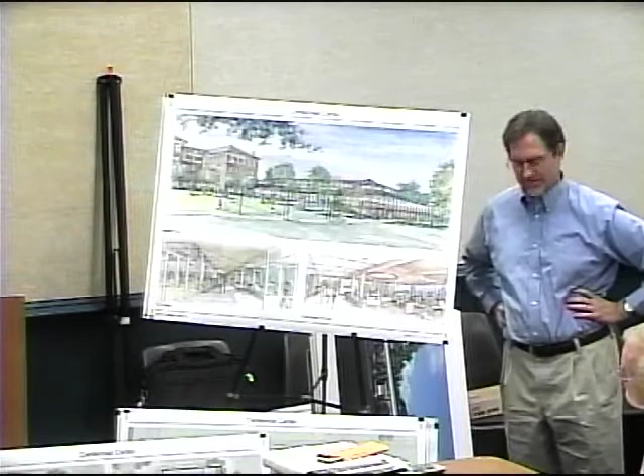Yeah, so if you're in the athletic field, you'll be much lower, looking up the hill, and you'll come up, so you can see that from the athletic field. What you'll see is, peeking out from the big trees, you'll see this guy kind of up there on the side, right there. There is a wooded area in between, but these things will kind of peek out. It won't be in your face because there are some large trees.

You have the homes down on Sand Hill, then there's a kind of buffer of some large vegetation.

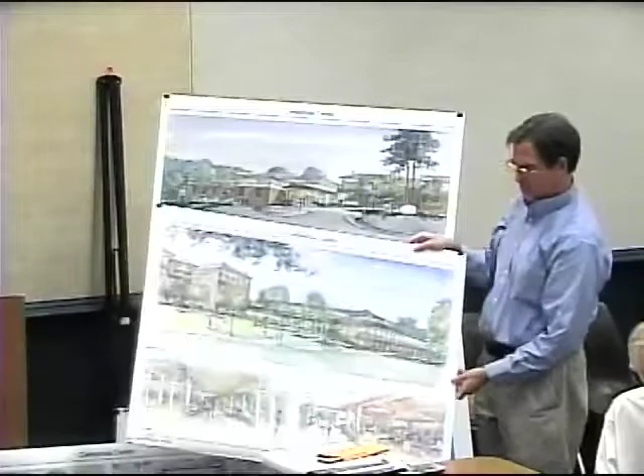So it'll be more peaked views from the athletic fields. Beaver Brook will still be your straight shot up, that's really Beaver Brook.

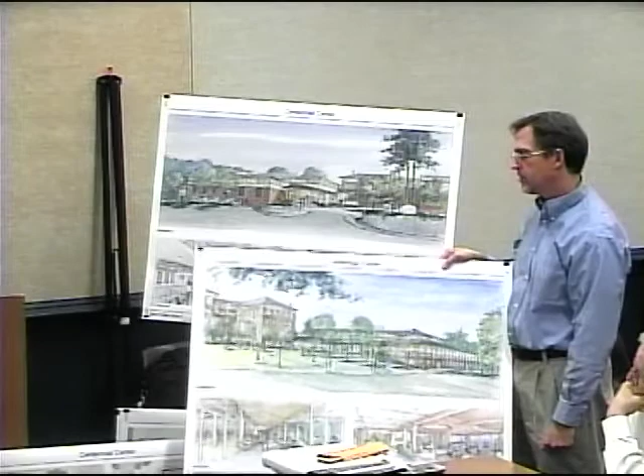It's interesting not to fight with the building anymore, but I think this will really feel porch-like and natural, very connected. Beaver Brook is the biggest building on campus, right? It really is, been added onto, but it's symmetrical - you can see that photo, that's from the front, and the other's from the back. On that side of campus, by far that's the dominant building. The church chapel is big and important, and on the other side the equestrian may be as big, but it's just not the same type.

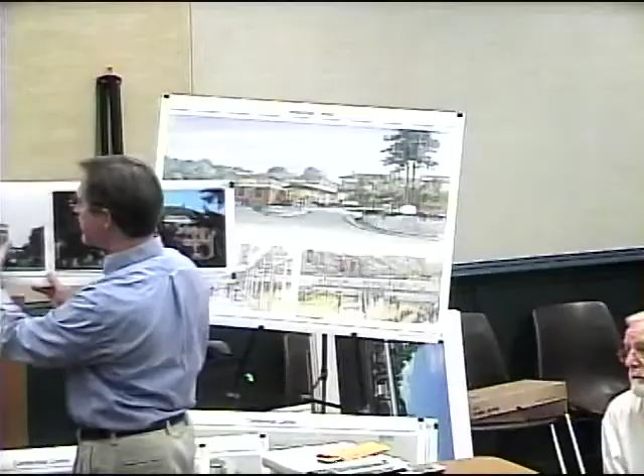It's so amazing how ornate this is, even with the white and all that, and how different it feels back here. I think coming off and attaching to it helps ground it a little bit. Absolutely, in my world we would build all along here. When was Beaver Brook first built?

I don't remember. Well, it's the centennial, right? I think Beaver Brook was one of the first - a piece of it was built, not all at once. I think this piece was built after, and then a lot of additions after that.

Speaking of additions - this has nothing to do with your addition, it's a beautiful project - but speaking of additions, the concrete one on the south, it's right here. I like it so much. It's more like brutalist, all concrete construction.

Well, that would be the library. Is it with the library? It's a great space. It is a library with that kind of walkway through there. So that's virtually the highway for the girls in the morning, but that's a great space.

The thing about the campus, I think it's missing two major components. First, if you go around campus, girls kind of have to go to libraries where they want to get together. It's not the best place to start socializing. So this gives them somewhere else - otherwise they're down in the basement of Beaver Brook.

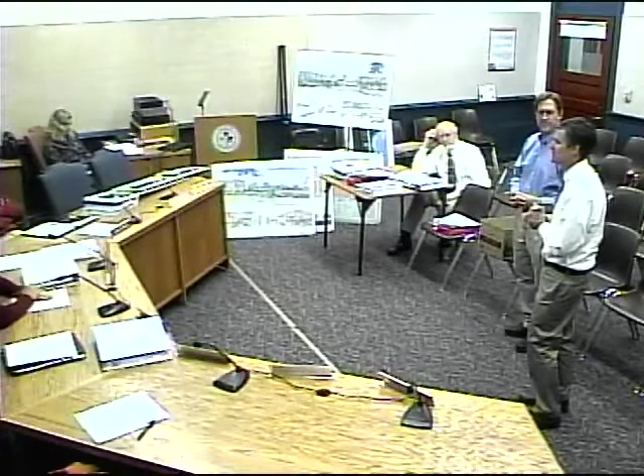The other thing is the lawn spaces - you have a public face on Bushy Hill, but it's not an intimate back door. By closing off that access drive through campus, I think this will become an extremely lively place. The other dorms are kind of tucked in the woods, there's not a lot of green space to throw a frisbee or have fun in the backyard. By cutting off this road, we anticipate this will become a lively part of campus.

It will change. So as you see, this is all part of the same program. The fields were to get the school excited and potentially get donors excited, and that worked out really well. The dorm got put online because the health center here has girls actually living in it. Once we demoed that building, we had to get another dorm online, and that helped out. If you go out there today I don't know if the building is still wrapped with abatement, but that building's coming down.

So this is - and that's why Lee talked about it for 3 years, he's been really living and breathing this. This is really the culmination of that master plan. That looks great.